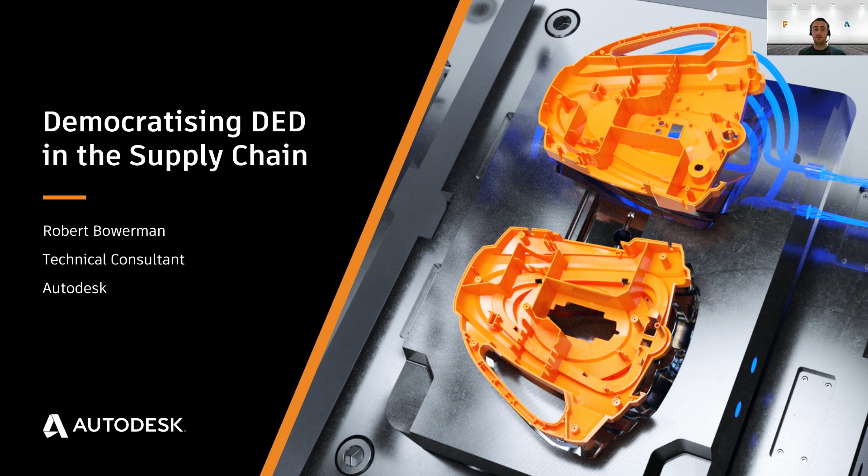A little bit about myself. I'm a technical consultant at Autodesk. I've been with Autodesk for about 3 years now, and I'm based in the Fusion 360 product team. I work from an applications point of view on directed energy deposition technologies. I work with end users, and I work in development projects to try and develop the technology and scale its uptake in industry, really. So this is what we're going to cover in this presentation.

We're going to do a brief introduction into DED. What are the variations of the technology? How does it compare to other metal additive manufacturing technologies? And then we're really going to look at where the technology is today, who's using it, why are they using it, what sort of products are they making, what machines are they using to make these products, and really what are the barriers that they're seeing and what's causing them to fail to scale this technology today.

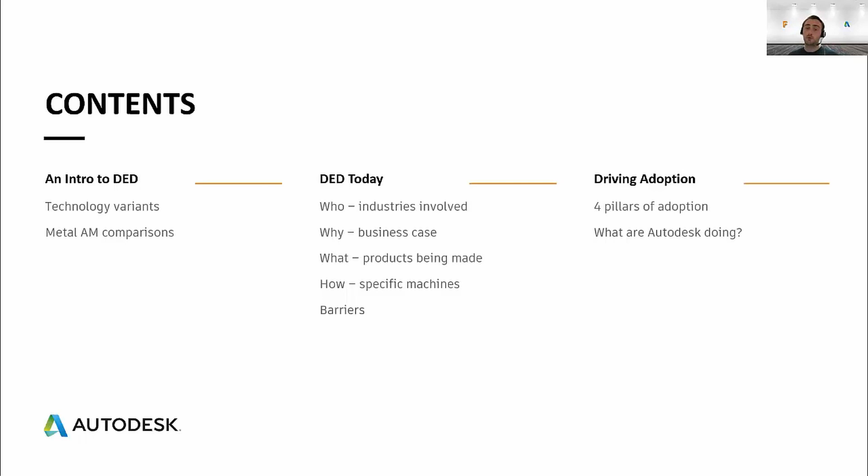Then moving on from that, we're going to look at how do we overcome some of those barriers and how do we really drive that adoption of this technology throughout industry and throughout manufacturing so that products can realize the benefits of this technology. So giving you a brief introduction to DED.

DED is one of 7 additive manufacturing technologies. So this is a very high level view as defined by the ASTM standard. There will be a few familiar technologies in there if you're familiar with additive manufacturing. Some of the more commonly used ones are such as powder bed fusion, which is where we're using a laser or an electron beam to melt together fine metal powders. And material extrusion. Material extrusion is a polymer-based technology where we extrude molten polymer to create layers of our component, and this is usually seen in low-cost desktop 3D printers.

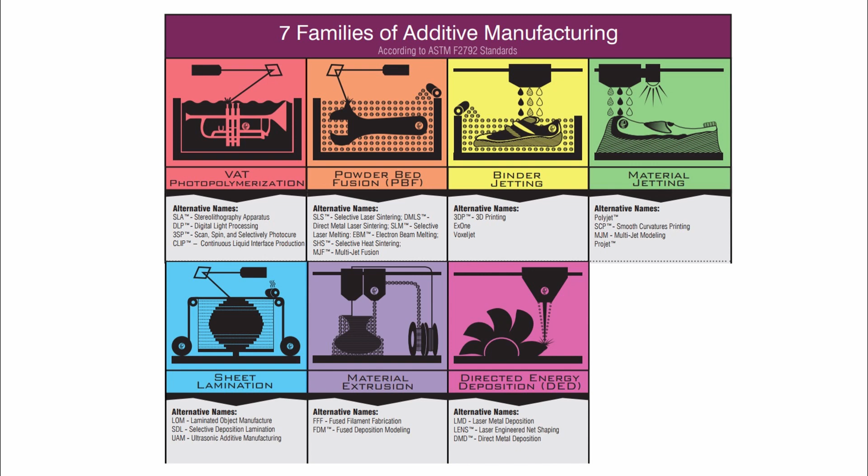We are going to be concentrating on the bottom right-hand corner of this diagram today, and we're going to be talking about directed energy deposition technology, or DED. Now, this is a very simple view of the world of additive manufacturing. In reality, there are a plethora of technologies out there. In each one of those categories we just showed, there's lots of different subcategories, different variations of how the technology is applied, and this gives us different technologies that we can use to manufacture our components, some being more advantageous in terms of speed, some perhaps in material, and some perhaps in cost.

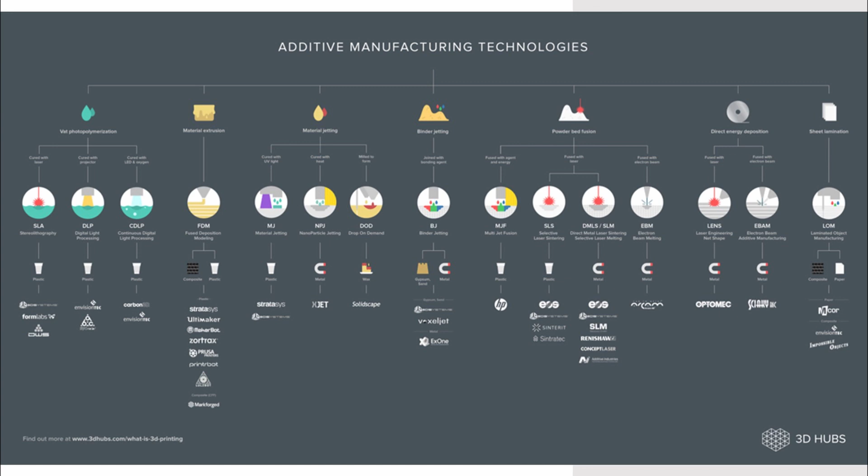We're going to focus in on the right-hand side of this diagram, and we're going to look at DED. We can see on here it shows 2 types of directed energy deposition technology, but in reality there are many more than that, and there are now a number of OEMs and providers of this equipment that are available to us. Now, directed energy deposition technology is primarily made up of 3 things. We have a manipulator that will move the processing head. This can either be a robot or it can be a gantry.

We then have a material feed, and that material feed can either be a metal wire or it can be a metal powder. And we then have a power source to enable us to melt that material feed. And that power source can either be an electron beam, a laser, or an electric arc. And it's the combination of those 3 things that make up the common types of DED hardware that we see on the market today.

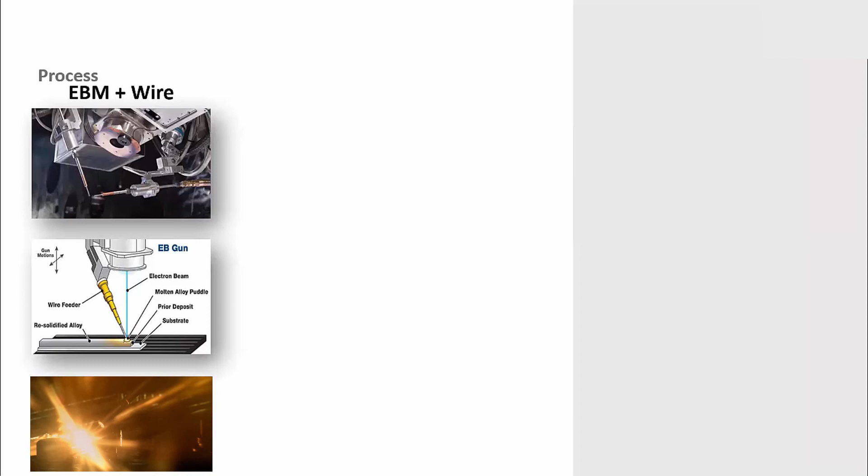So the first one of those, as you can see here, is an electron beam gun plus a wire feedstock. The next one is an electric arc plus a wire feedstock. The third one is a laser plus a wire feedstock. And then the final one is a laser plus metal powder. And these are probably the 4 most common types of directed energy deposition technology that we see being used on machines and in industry today.

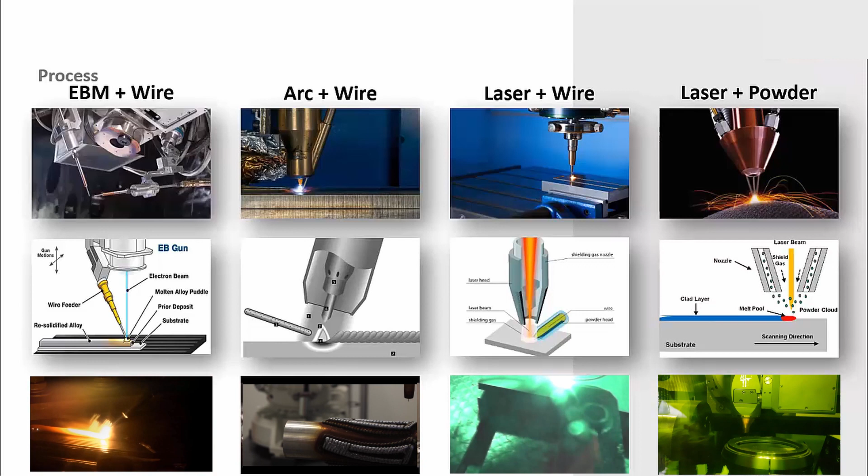You can see there are a few other differences between the technologies. So for instance, on our arc wire diagram there, we can see the material being fed in from the side. And if we look at our laser powder diagram, we can see the metal powder surrounding the laser beam. This is what we call a coaxial system. So if we compare DED to other metal additive manufacturing technologies, we can see there are several differences.

Traditionally, DED is used for making large components. This is because in DED, we're depositing kilos of material per hour, whereas in other metal additive manufacturing technologies, we may only be depositing grams of material or consolidating grams of material per hour. So we can make large parts and we can make them relatively quickly.

But the trade-off there is that we don't get the fine detail and resolution that we see with powder bed fusion technologies. So we can only make larger parts and we can't get the small detail that we see with powder bed.

Other advantages: because DED is a deposition method of additive technology and not a consolidation method of additive technology, we can mount a deposition head to a gantry or a robot. This means we can control the deposition in multiple axes, which means we can manipulate the part as we build it, therefore overcoming some of the issues with technologies like powder bed fusion, which require support structures. If we can manipulate our part to remove the overhang angle, we can, in theory, build our part without support structures.

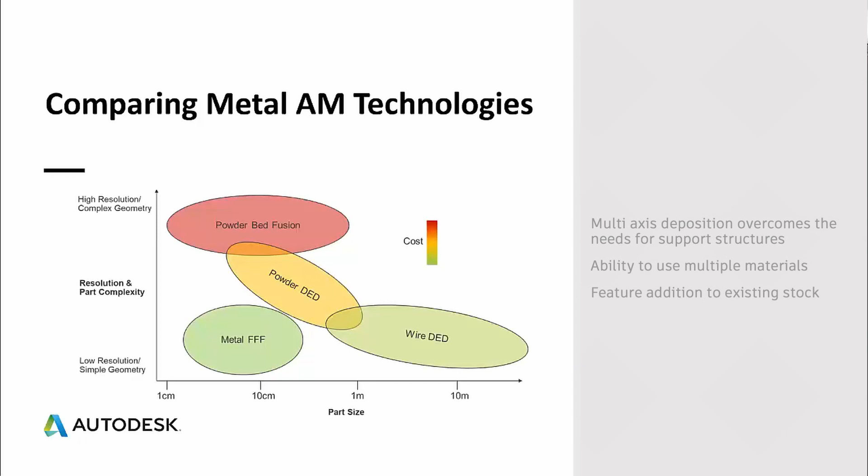Because this is a deposition method as well, we can use multiple materials to build a part because we can simply swap the material during the building process. And finally, we can start with a pre-existing component. Because we can mount this into a machine tool, we can put any existing stock into that machine tool and we can deposit additional features onto that component. We don't have to start with the same plate every time and start from scratch.

So that was a very brief introduction to the technology. Now we're going to look at where DED as a technology is today, who's using it, why are they using it, what sort of products are they making, how are they making it, so the specific machines that they're using, but what are the hurdles that they're still facing in their industries today.

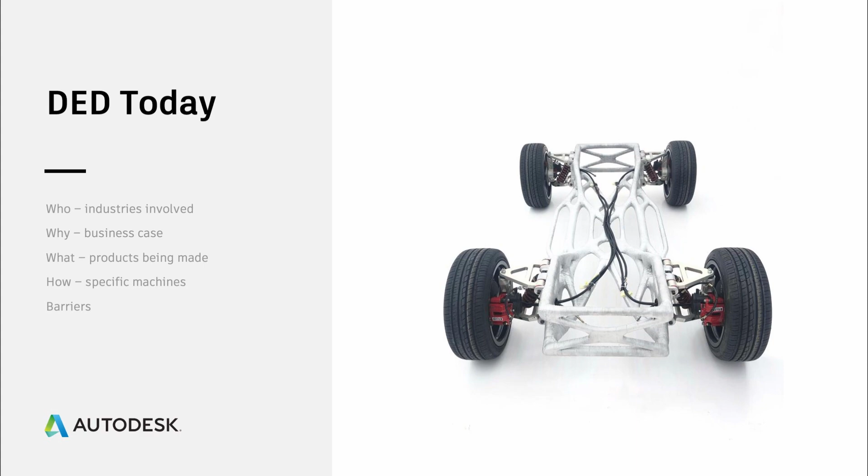So we've worked in this technology for several years now, and we've worked across a range of industries from marine to aerospace to automotive, oil and gas companies, and also heavier industries as well. And these industries are all vast consumers of manufactured products. They manufacture a lot, and they tend to be larger structures, and the products that they make tend to involve a lot of energy and a lot of material to make.

These industries also have incoming restrictions and a lot of pressure on them to become more sustainable. So they need to make their products in a more sustainable way. So they're looking for new technologies such as additive manufacturing, such as directed energy deposition, to enable that sustainability in their products. And that happens in a couple of ways.

They're looking at shorter production lead times. On some of these large components, they have extremely long production lead times waiting for castings and forgings. So can they supplement that incoming material with a directed energy deposition version of that casting or forging? They're looking at reducing their material waste. Can they additively manufacture a part that's close to the net shape so that when they come to machine it, they're only removing the smallest amount of material possible?

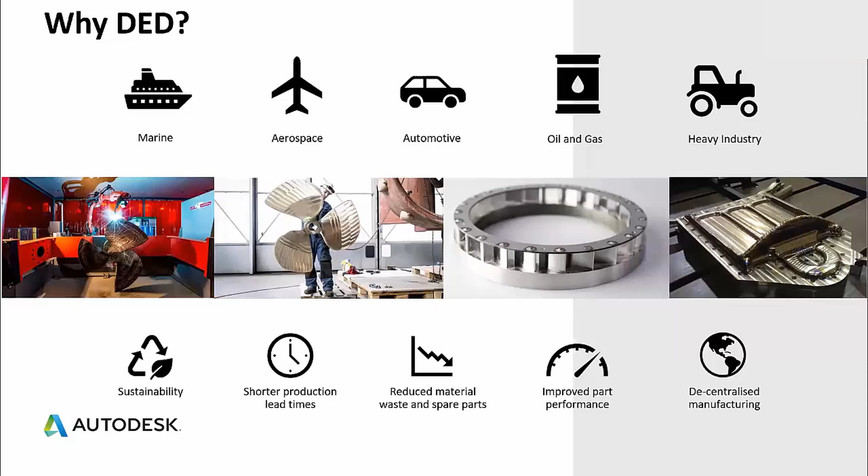They're looking at improving their part performance. So can they take the design freedoms of additive to change the geometry of the component to improve its performance? Or can they add novel materials on top of an existing surface to improve its performance? And finally, they're looking at decentralizing their manufacturing process. So traditionally, factories were only located in one area and their products were sent all over the world to be consumed. But now, can you decentralize that factory and produce the product where it's required?

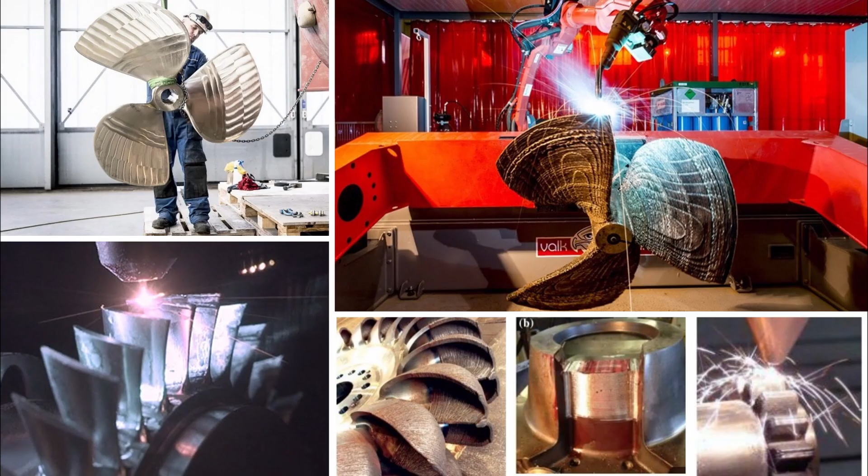So what are they actually making? I've split this into three categories. The first category here is products that are supplementing that existing supply chain. I mentioned before, in a lot of these industries, they use large castings and large forgings that can have weeks, sometimes months lead time on top of them, where simply we're waiting around for this product to come in. Can we supplement that part of the supply chain and produce a DED version of that casting or forging so that our development cycle is significantly reduced, our production cycle is significantly reduced from design or conceptualization to delivery of the product?

We're also seeing a large uptake in repair of components and reducing the amount of spare parts that industries are keeping. The marine industry is a very typical example of this. They have a boat that's sat in a dock, and that boat may have a broken propeller or a broken component, and therefore it can't go anywhere. To mitigate this risk, what the marine industry do is they keep large warehouses of spare components for the one day that they might need to replace out that part.

But obviously that's extremely inefficient, and you don't know if you're going to ever need that component. So they're looking to directed energy deposition as a technology to replace that warehouse so that they can produce the specific component they need on demand, where it's needed and when it's needed.

In addition to that, companies are looking at extending the life of their products, high value products, by adding new material on worn surfaces of parts that have come out of service, adding that new material, machining that part back to its original specification and putting that component back into use, reducing the overall material wastage and increasing the life of that component that they've manufactured.

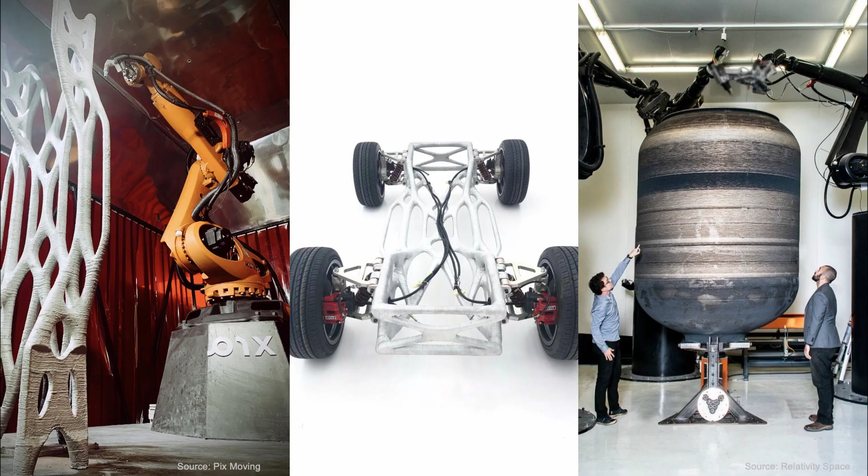Finally, we see several players who are simply trying to disrupt incumbent industries that have always manufactured products in the same way. We can see a couple of examples here. The left two pictures are from a company called Pixmoving. Pixmoving are looking at disrupting the automotive industry by creating an autonomous vehicle that is manufactured with directed energy deposition. They can manufacture this vehicle on site where it's needed and reduce their carbon footprint of having to ship these components around the globe.

On the right-hand side there, we can see a picture from Relativity Space. Relativity Space are trying to disrupt the space industry by creating a factory that can build rockets in a matter of weeks and months as opposed to years and sometimes decades.

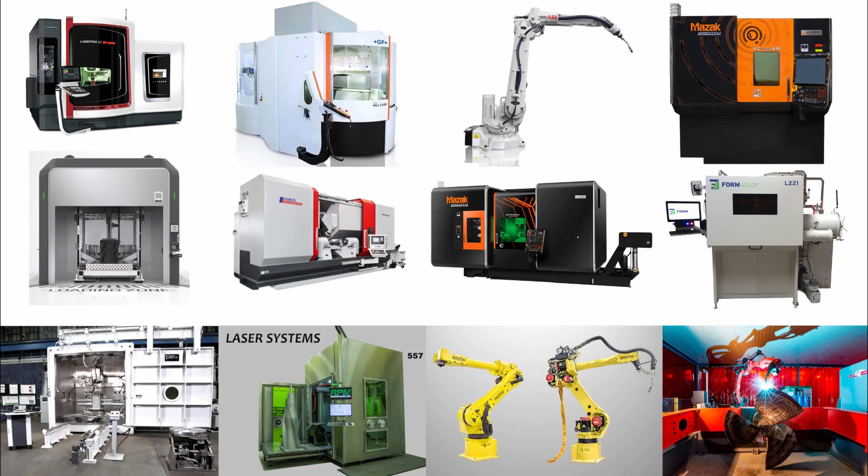So what are these guys using? What kind of equipment do they have out there available to them? Well, there's a large range. There is pretty much a machine offering from every major machine manufacturer that you can imagine out there at the moment. And these range from gantry-style CNC machines to deposition heads that have been placed onto robots, to hybrid machines that have deposition and milling capability, to purely deposition machines that can only do the deposition aspect of the process.

These are not standardized. They're obviously built on existing machine platforms, but they all have their own approach and they often all have their own unique technology built into the head. So going from one machine to another is not a simple process. And if you're learning one machine, you're not necessarily going to be able to use another machine. If you are taking a process from one machine and you want to try and build the same component on another machine, your results may not be the same either.

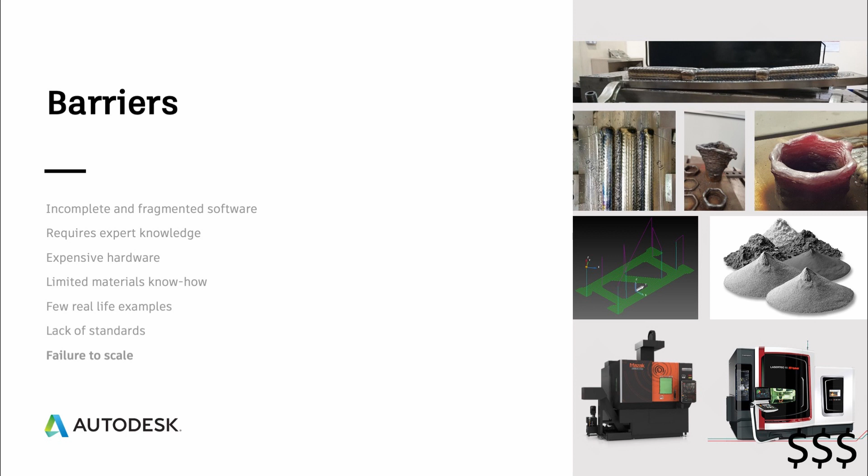I've shown some good examples here, but really there are still relatively few real-life examples where companies are using this in full production. And behind everything, behind the process and behind the hardware, there really isn't much in the way of standards. So that means the equipment is not standardized, the processes aren't standardized, the way of testing these parts is not necessarily standardized. And all of this is leading to a failure to scale this technology in a good way. So all of these barriers have created a failure for this technology to scale. And what that means is industries that could benefit from using this technology aren't realizing that benefit.

So the question we ask ourselves is, how might industry gain access to DED technology so they can manufacture their products with it and realize the benefit of using this technology to make those products? To achieve that scale, really we've got to drive the adoption down the supply chain. The industries that would benefit most from this technology are made up of vast supply chains, not just 1 and 2 tiers, but 3 and 4 as well.

And for years, we've worked with the guys at the very top of those supply chains. But to get mass adoption and to get the critical mass the technology needs to be successful, really, we've got to drive that adoption down the supply chain to the lower tiers as well. But to enable that adoption, to get those guys at the bottom of those supply chains interested, we've got to overcome those current barriers that we've already spoken about.

So as a reaction to this, we've put together these 4 key pillars that we want to concentrate on and we feel industry should concentrate on to try and overcome those barriers and drive this adoption down the supply chain. Now, those 4 key pillars are around the hardware. This is working with and enabling low-cost and accessible machines. Around the software, creating accessible, integrated software workflows. With people, creating tools that reduce the amount of specialist knowledge that people need to have. And looking at the process, making robust and reliable processes so we can achieve those first-time right builds.

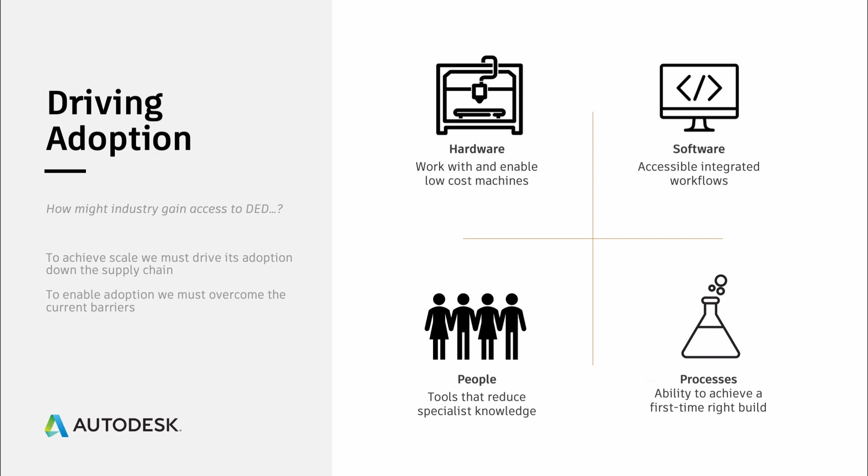Now, if we look at the hardware in a little bit more detail, we need to make hardware that's accessible in terms of cost, but also in terms of the amount of knowledge required to drive the machines. We need to create hardware that is robust so that we have repeatable builds and we have reliable hardware that's not going to be breaking down on us all of the time. And really, those 2 things could be helped by driving standards in the area as well.

There are very few standards for DED machines and hybrid machines. But if we drove specific standards in this area, we would see more robustness, repeatability, and reliability in these machines. But we would also reduce the learning curve from machine to machine. If you learnt machine A, in theory, you could move to machine B and still be a relatively competent user. Akin to that, if we built a part on machine A, and then we went to build it on machine B, we would be closer to getting the same result on both of those machines.

So as Autodesk, we've worked with a wide range of machines. We've worked with pretty much the entire spectrum. And traditionally, we only really saw machines on the right-hand side of this scale. These machines are difficult to access. They have a pretty high price tag, and they require several experts to be able to run them. What we're seeing coming into the market now, thanks to some technology advances, are machines on the left-hand side of this scale. These are machines that are more accessible in terms of their cost, but they're also more accessible in terms of the amount of people that you need to run them.

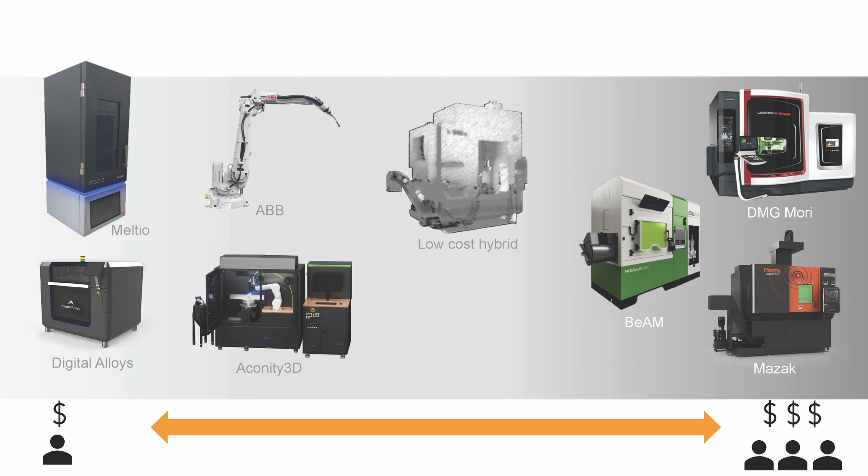So we're making an active focus to support these machines and make sure that they grow in their scale and their use. What we can see, though, is there's still a divide between these 2 machines. On the left-hand side, we have predominantly deposition-only machines. And then on the right-hand side, we have some hybrid capability also. So what we're doing to try and bridge that gap is we're actively working with a couple of partners to produce a demonstration machine which shows hybrid capability at a level that's never been realized before.

When we move on to software, we have some similar themes. We want to make software that's accessible. Again, that's in terms of cost of a user being able to get hold of the software, but also in terms of use as well. We want software to be integrated. So whatever tools, whatever capability you're using in that software, we want that to be in a single location, and we want that to be a cohesive experience.

And we also want software to be connected. So we want the workflow to be connected. We want the software to be connected and be able to talk to your machine. But we also want it to be connected to your mobile devices so that you can retrieve your data wherever you may be, whatever time of day it is. And really, as Autodesk, this is our biggest space to play. This is where we can have our greatest impact as a company.

This is a traditional workflow for DED, really, and hopefully some people listening to this presentation will recognize it. We take a part that we've designed, we then redesign that for the manufacturing process, so we remove features we can't build, we add stock onto the component, for example. We do our additive toolpath planning, create our toolpaths in our CAM software.

We might do some process simulation, so this will show us the heat buildup in the component during the deposition process. It'll also show us the distortion in the component so that we can see if we have enough stock on our part to get to the final shape. We can do some machine simulation, so this will show us the kinematics of the machine. It will show us issues around collisions and gouges during the process.

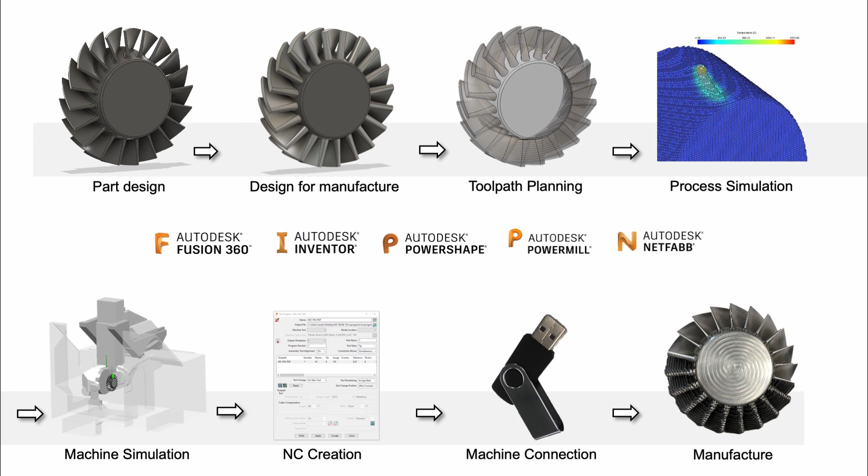With PowerMill, we can use PowerMill additive capability to create our toolpaths and to do our machine simulation and to post-process to get our G-code. And with Netfabb, we can use the Netfabb simulation utility to do our thermal and mechanical simulation. Now, this is great. It's covering the entire workflow, but we still realize that this is a bunch of discrete solutions that can be quite confusing for a user on which solution they need to use in which part of the workflow. And that can cause mistakes. And really, we want to avoid that.

So that's why we're actively working on taking all of this capability and joining it in one innovative platform that enables you to move up and down that workflow with seamless data transition, having all of the solutions in a single location to avoid any of that confusion, minimize the mistakes that are being made, and optimize your workflow.

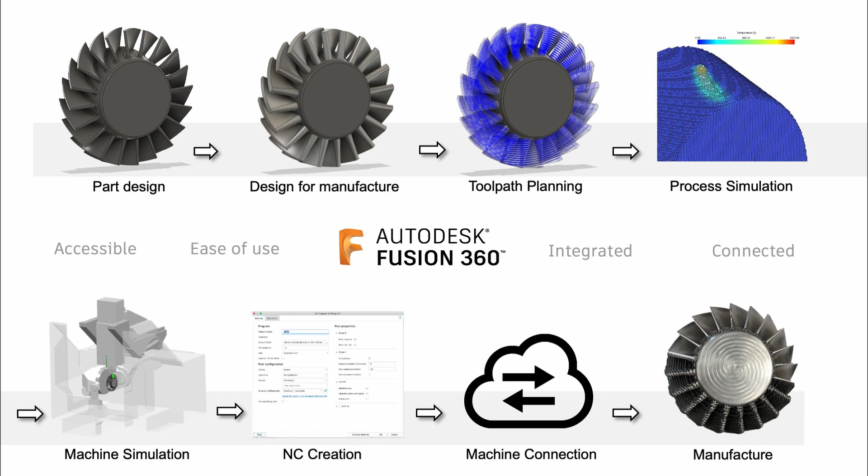When we think about people, really this is giving people access to content so that they can upskill themselves and they can learn about the technology. Having accessible content and courses online or in person is extremely important to scale the knowledge that people require to be able to drive this sort of technology. And trying to do that in an innovative way, so not necessarily just face-to-face classrooms, but having it online, allows us to scale it in a way that we need to.

Also, having communities of users and access to experts enables people to ask questions and solve problems very quickly, which previously would have put them off from using the technology. We're laying the foundations in our software to enable some of these things. So giving people the ability to upskill themselves, we have tools in software like the Learning Panel, which can teach them about new workflows or teach them how to use the specific tools. But wouldn't it be great if this could also teach them about the manufacturing process as well?

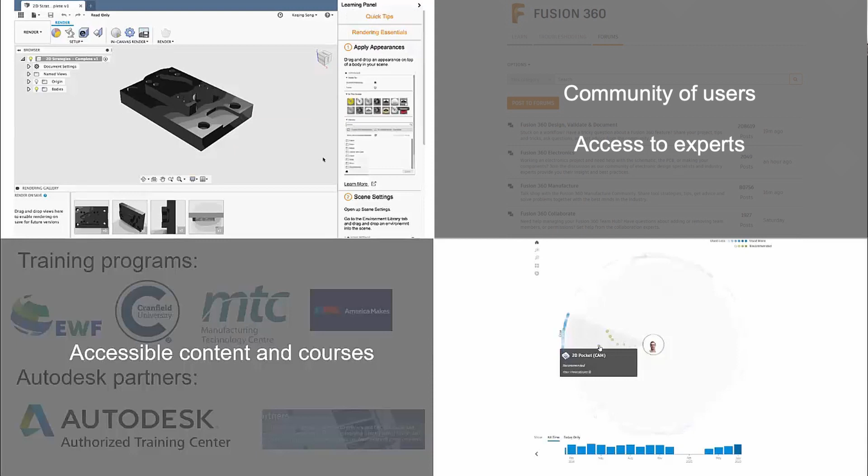Moving on to the bottom right-hand side of this slide, this is showing a tool called the command map. And the command map essentially maps out all of the commands that you've used within software. So it gives you a little bit of a skills matrix of where you might be proficient in the software and where you might be lacking. So it gives you an idea of where you need to focus your learning time to become more rounded and proficient in the entire software suite.

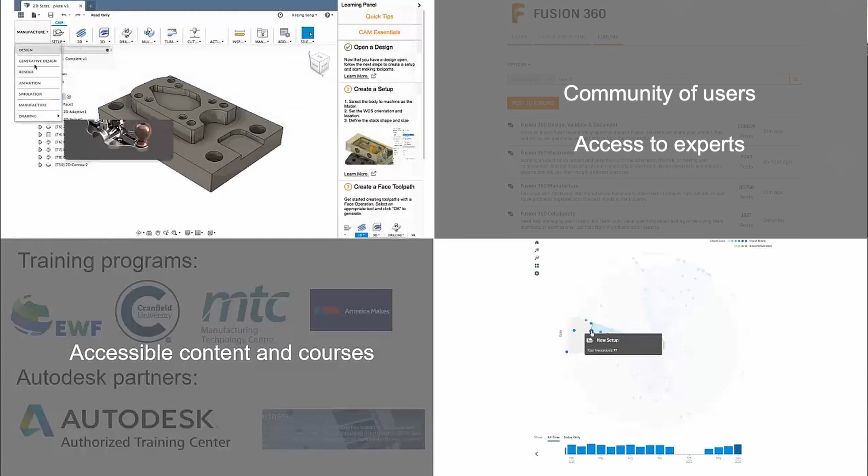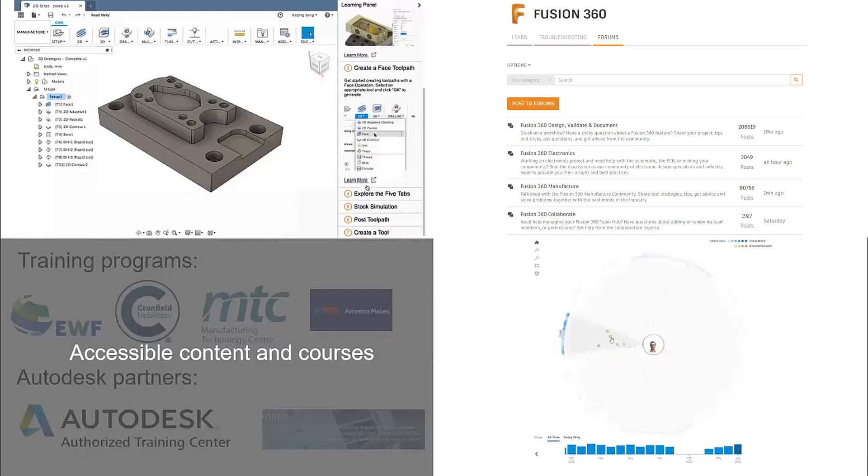We also have a growing community of users on our forums who are everything from hobbyists to expert users, but we find they are very responsive and they are very engaged, and it's a great location for people to start learning about the technology, but also ask more advanced questions. And these forums are monitored by the experts here at Autodesk, who can also help answer and solve some of those questions.

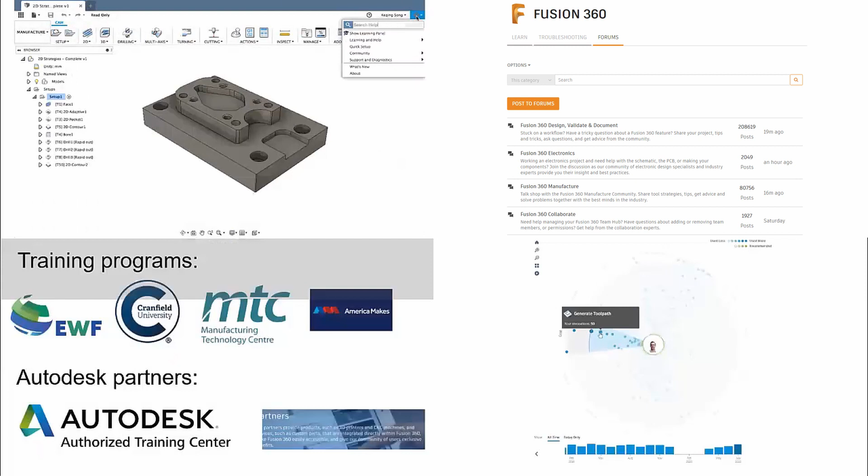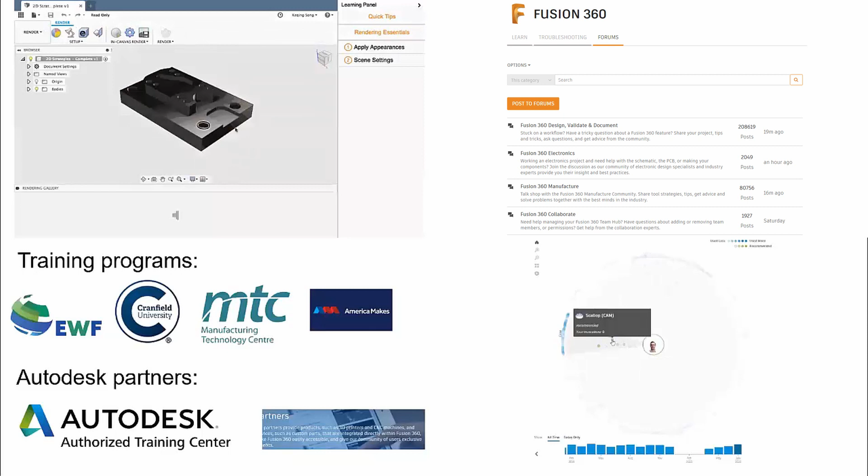One area where we do see a lack of growth, and we do need more growth, is in accessible content and courses that people can use and consume. We see several companies and organizations out there that have more formal training programs now, but we do need to grow this area, and we also need online courses that people can access if they can't travel to face-to-face courses. We're trying to do this with some of our Autodesk partners and having a network of partners who can provide training, so you can come to us and we can tell you where you can go and get applicable training for the skills and for the technology you're trying to learn about.

Finally, we come onto the process, and really we've split the process into 3 questions that we see users ask us and ask themselves during their experience of using DED. The first question they always ask is, where do I start? How do I know what parameters to use, and how do I know how to build this part to begin with?

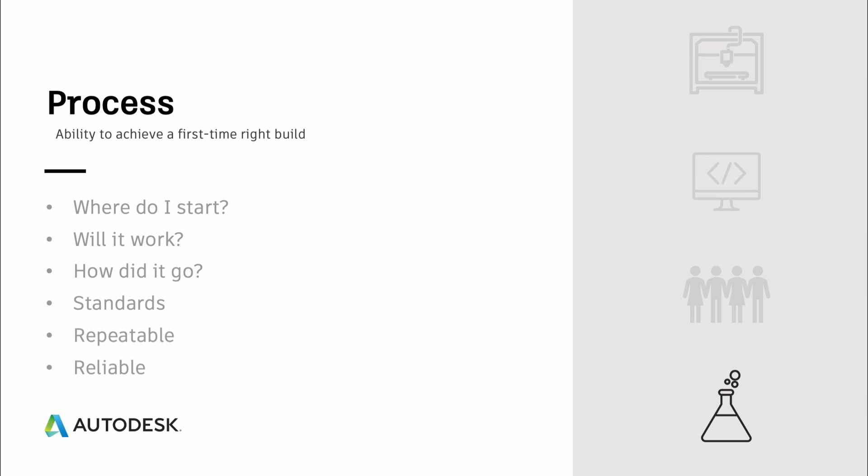The second question is, once I've programmed it, will it work? How am I going to know if it's worked? And then when I built the part, how did it go? We look at the component, we say, yes, it's good or it's bad. Does it adhere to the specifications that I started out to begin with? So we're looking at a number of areas to try and address some of these questions.

So when we think about where did I start, can we embed knowledge of the process into our software? Can we have more process-aware toolpaths? Can we have a way that software can guide the user on building a certain component? When they think about material parameters, how do they get access to material parameters? What parameters do they start with?

Sometimes a manufacturer will give you parameters that will be a starting point, but this isn't necessarily commonplace. So can we think about potentially in the future having something like an open market where we could purchase parameters or we could share parameters with each other, at least to give us a starting point?

When I think about will my process work, we're developing software tools that will enable you to predict the process that's going to happen. So we're using simulation to be able to predict the heat buildup in our component. And from that heat buildup, we can also see the distortion that we will likely see in our component as well. And this gives us great indication as to whether that component is going to build correctly, whether we're going to put too much heat into it or whether we're going to distort too much, and whether we're going to get a good part out or not.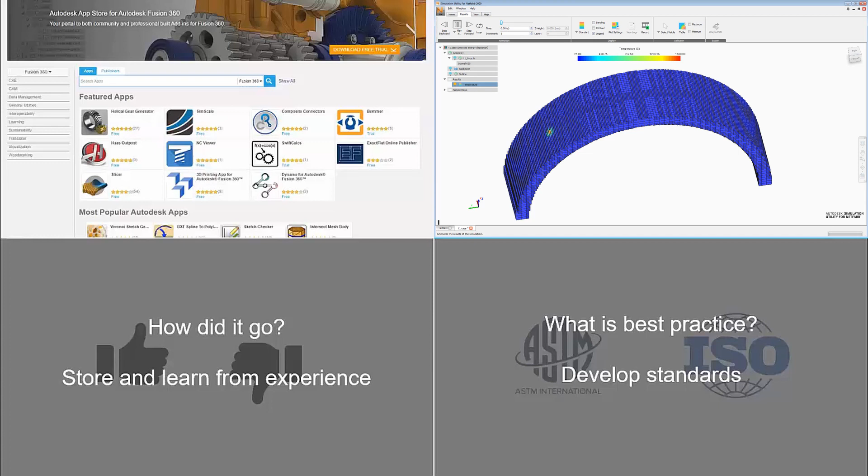When we get to the end of our build process, really we want to rank or rate how that process went. Did we have a successful build? Does the part look good? Or did we have a failed build? And from gathering that knowledge around the process and the experience that we've had, can we learn for next time so that we don't repeat the same mistakes if we're building the same component? Or if we're building a similar component, can we learn what we should do better next time or what we should change in the process to increase our likelihood to have a successful build?

And finally, where does somebody go to learn about the best practices? Can we develop new standards where somebody could take that standard and they could see how they should be running their process or how their machine should conform or how they should be testing their components afterwards, so that we have a more standardized method across the industry?

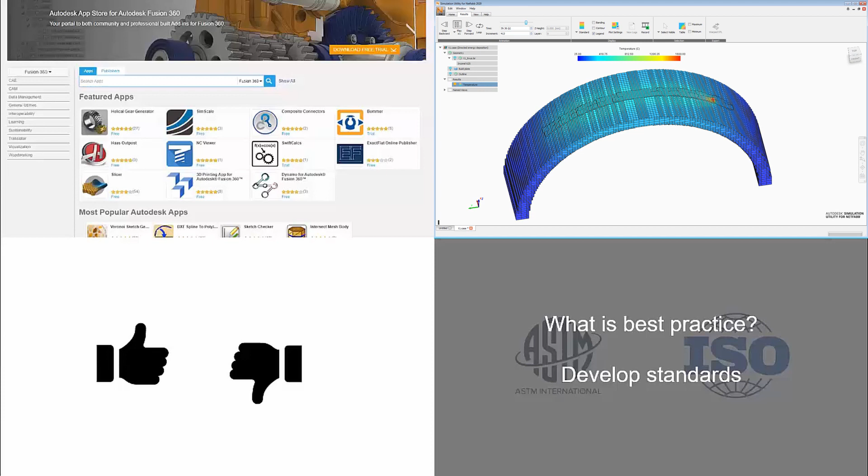So we've covered a lot of ground in this presentation. We started off by giving an introduction to DED as a technology, what the variations of that technology are. We then looked at what industries were using this technology to build components and why they were trying to do that, and the sustainability issues that they have with their manufacturing processes they're trying to overcome. We then looked at specific examples of what they're making and what machines they're using to make it.

But then we asked the question, so why aren't more companies and more industries adopting this technology? And we looked at the barriers that still exist today and that are in the way to stop that scale of adoption. We went on to say that there are vast supply chains out there that feed these industries. And really for the industry to benefit from these technologies, we need to drive this technology down those supply chains. And to do that, to enable that adoption down the supply chain, we need to overcome those current barriers.

To overcome those, we put together these 4 key pillars that we think we need to target. Those are hardware, people, software, and processes. And by targeting these and developing technology in all of these areas, we feel that we can produce a product that is accessible to industry, that is accessible to the supply chain, that will scale this technology and enable more manufactured products to realize the benefits of producing their parts using DED.

We know we can't do this on our own though. So really, we're asking for and looking for collaboration from people that work in this space and are also interested in this motion of scaling the technology to work with us to try and do so.